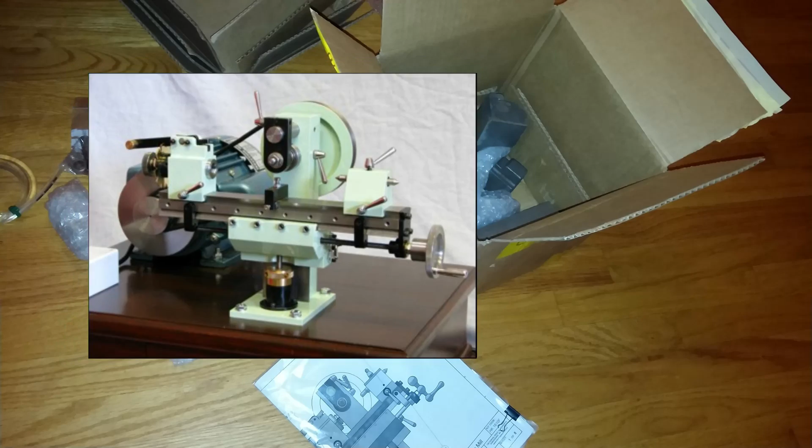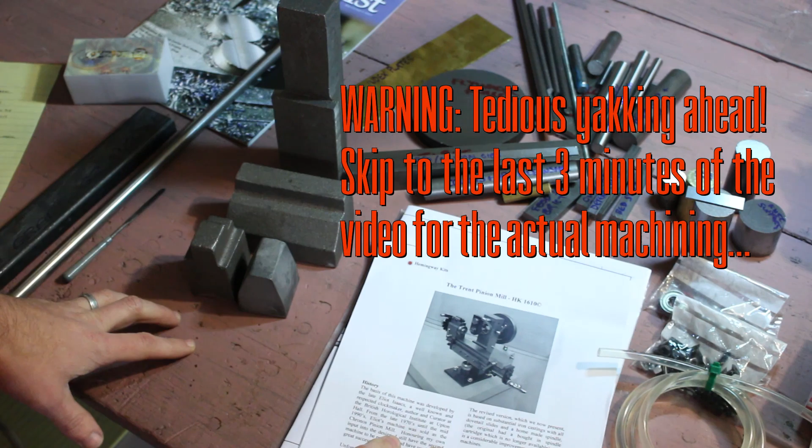What you see spread out before you is the components for the Hemingway Trent Pinion Mill casting kit. For those of you unfamiliar with this machine, it's basically a specialized horizontal knee mill designed for cutting small steel pinions. Some of you might be familiar with this machine in passing. Personally, I sort of lusted after it for quite a while. Always wanted to build this thing.

If you want to learn some more details about it, head over to Hemingway's website and check it out. It's a neat little machine that has an interesting history, and I think will be a really useful machine for me here in the shop as well.

Now, normally I wouldn't spend this kind of money on a project sort of kit of stuff to build something, but this is a machine I can legitimately get a lot of use from in the shop, and it was also a very generous gift from family members for my birthday. I'm not sure if I ever would have purchased it for myself. I've certainly been tempted in the past.

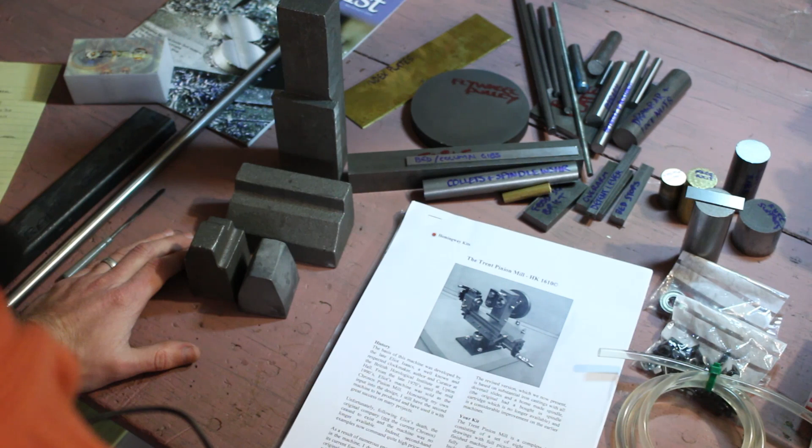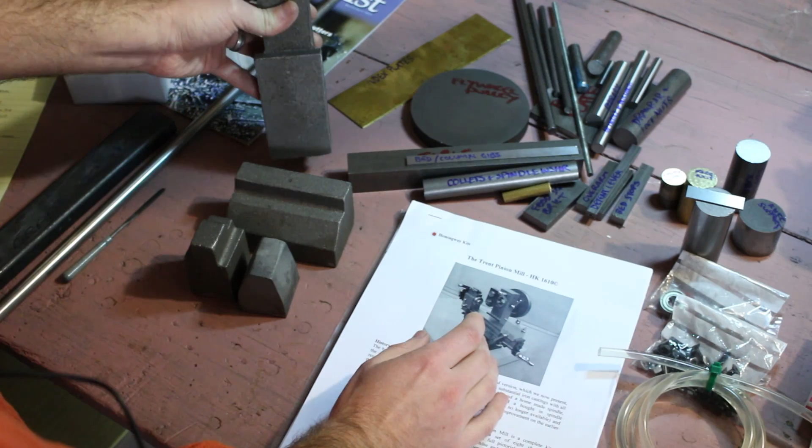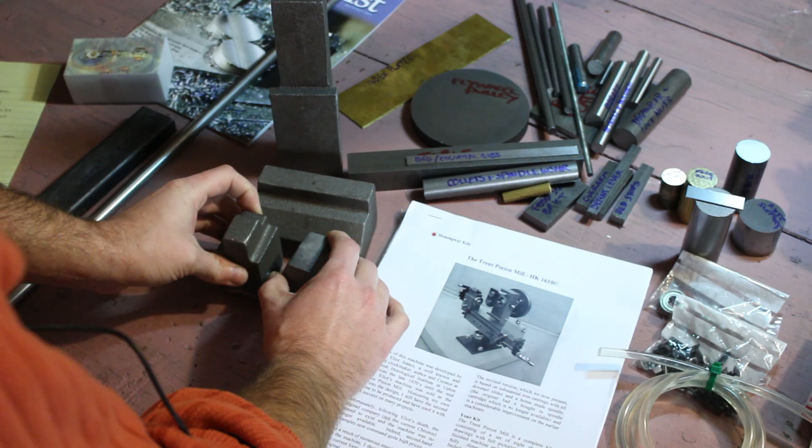As far as castings, there's only a handful here. The column, which will have the dovetails here for the knee. The knee itself. And the headstock and tailstock for the indexing work holding mechanism. You can kind of see here in the picture.

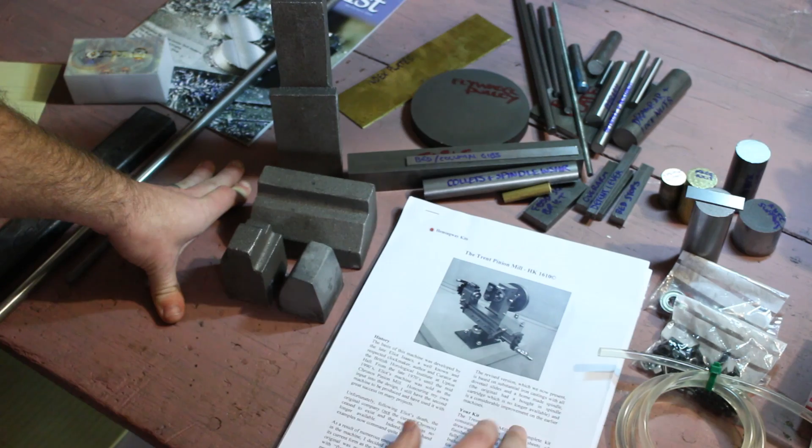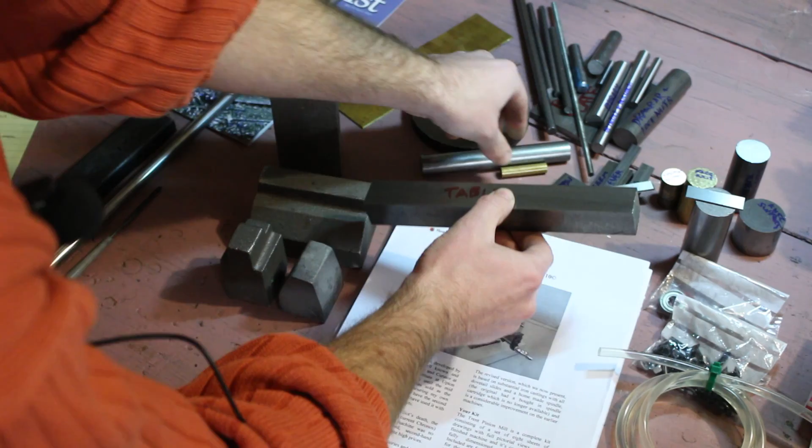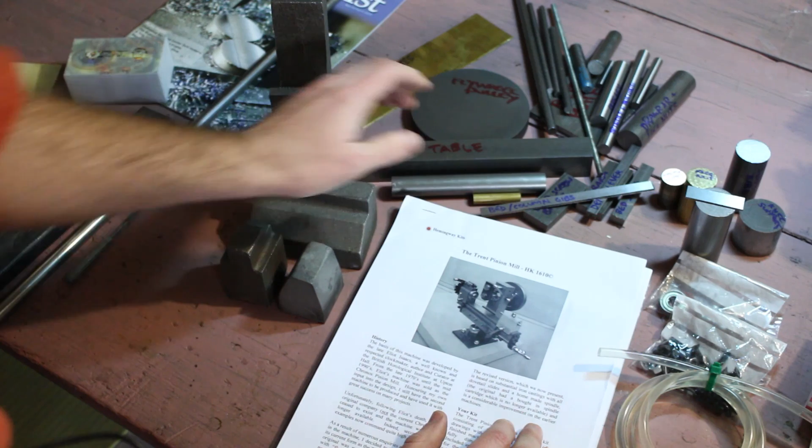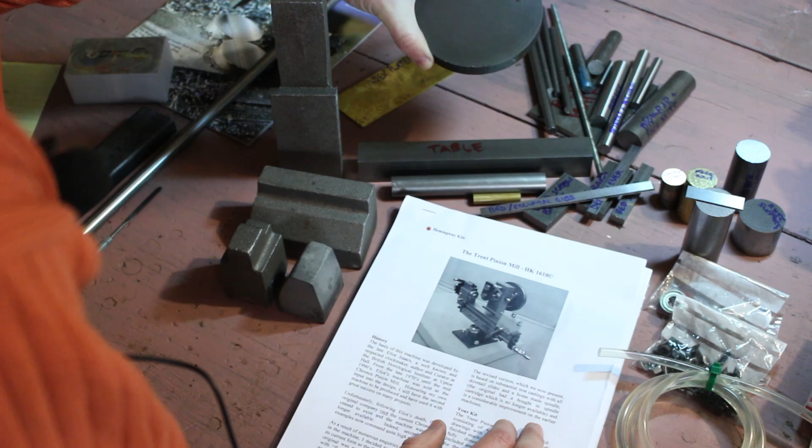The bed or table is not actually a casting at all. It's just made from a piece of cold rolled mild steel. I do have a length of Durabar that I could use instead, but I don't think I'm going to. I think I'm going to stick with the mild steel for that. And the only other cast iron piece is the pulley. This is what appears to be a slice of continuous cast iron, like Durabar, if you will.

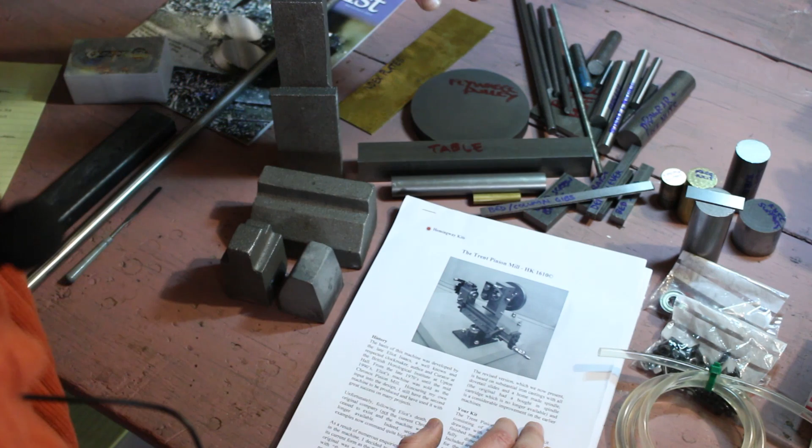The base plate that the column mounts to, that the machine sort of sits on underneath here, that's just a 1/4-inch thick plate of mild steel as well.

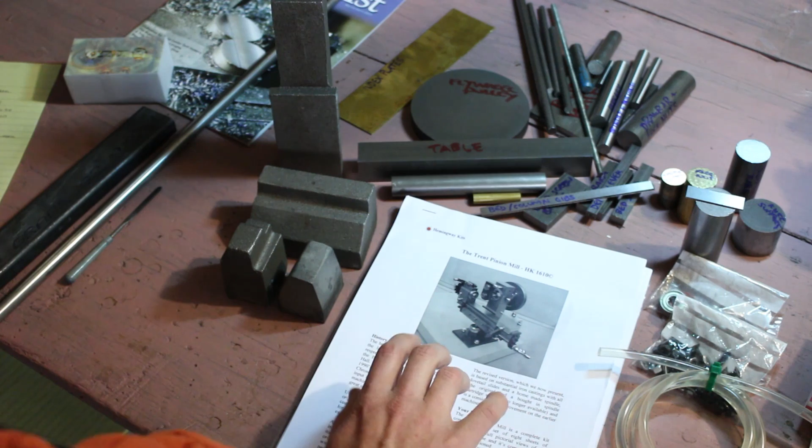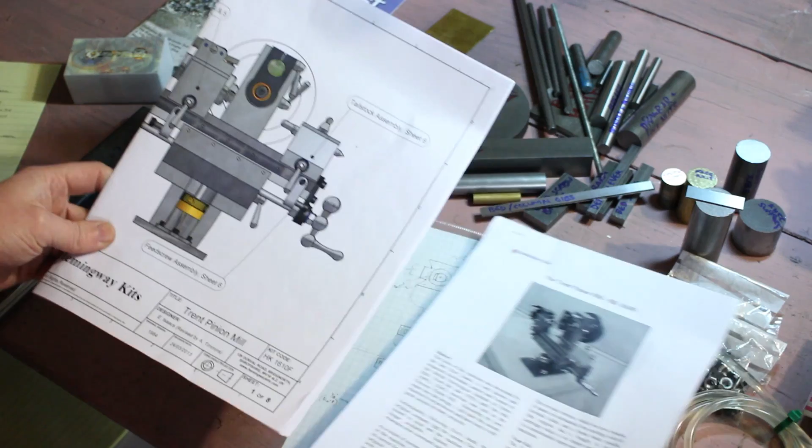One of the things that impressed me the most about the stuff that was sent as part of the kit was the documentation. And Randy Richard, I'm sure you're all familiar with him and his YouTube channel. He's recently built a couple of Hemingway kits, and he made the comment that the drawings that came with them are just fantastic. And he's absolutely right. I mean, they're super nice. Give you a quick look here. If you want a more detailed look, you'll have to buy the kit.

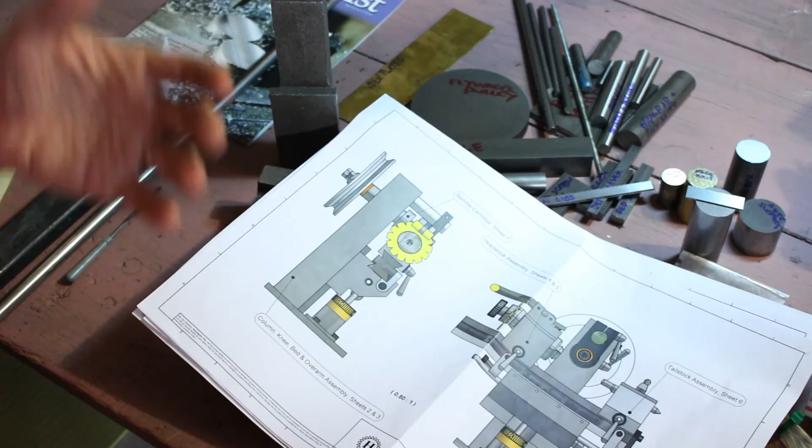I think they sell the drawings separately as well, and this honestly wouldn't be all that much more difficult to build from bar stock. In fact, the machine that this was based on, the Kronos Pinion Mill, was designed to be built from bar stock.

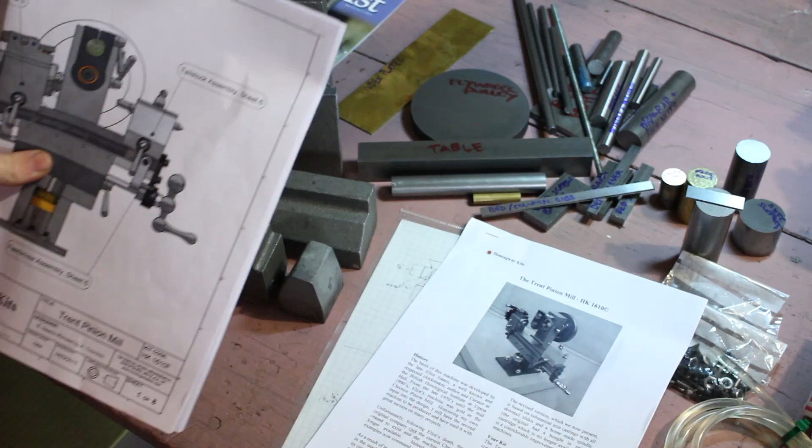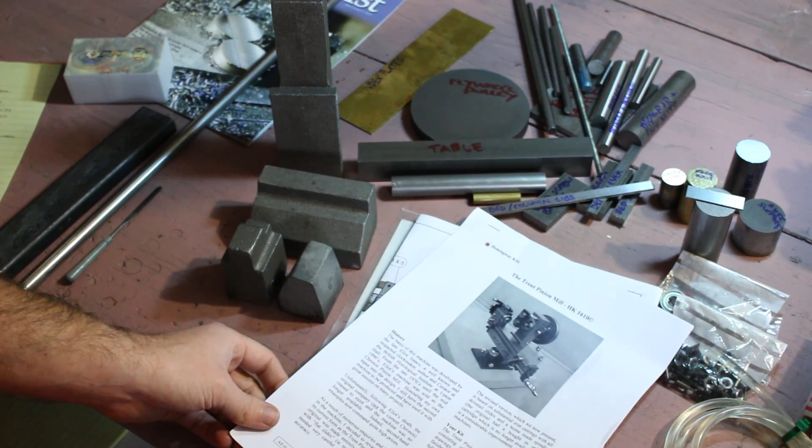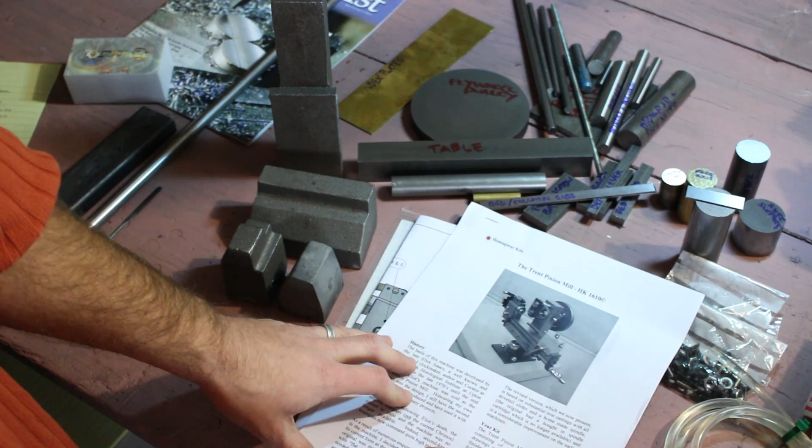Well, the drawings are excellent. What really blew me away that I didn't quite expect: I knew it came with some build documentation, but I didn't expect it to be this thorough and detailed and well written. This is written by Alan Timmins. I believe he's the guy who revamped the original Kronos design to become what is now the Trent Pinion Mill. And it reads like a magazine article. Perhaps it was at one point.

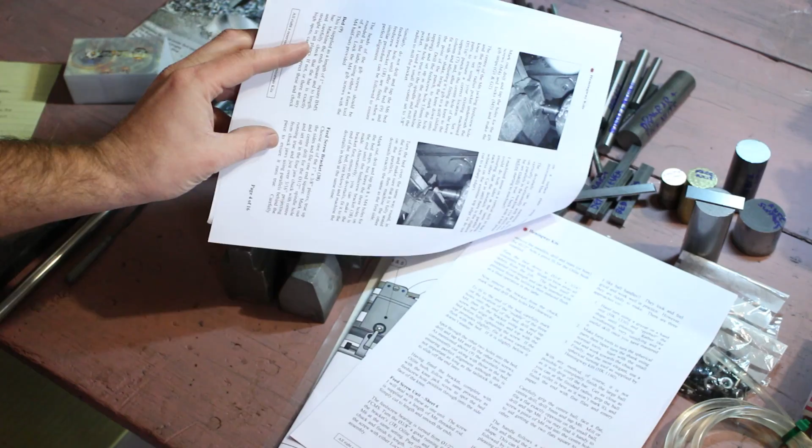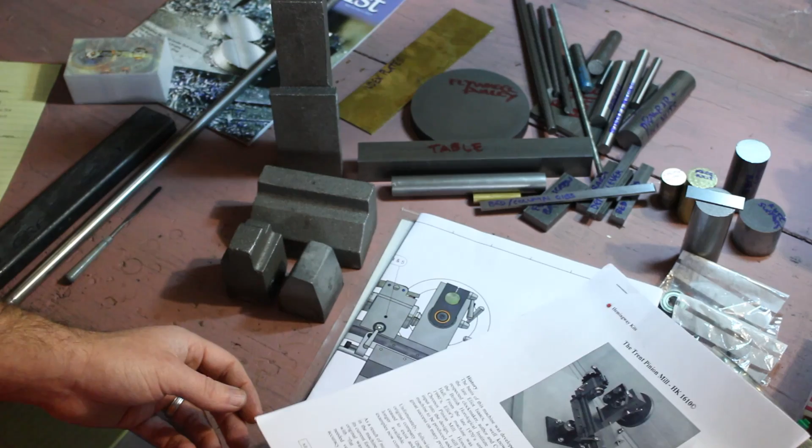Not only is it step-by-step build instructions that are well written, it goes out of its way to tell you why you're doing things particular ways and refer to other parts in the document where there will be steps related to the step you're performing. And there are even some alternatives you can take to some of the steps that are explained. I definitely appreciate that. That makes this a very achievable project, I think.

One of the kind of oddball things that I didn't expect with this, and I think Randy mentioned this in one of his videos as well, I want to say it was for the radius turning attachment. The units are mixed. Most of the dimensions in the drawings are imperial. The only dimensions that aren't are clearance holes for some of the fasteners, for example, because the fasteners are all metric. The feed screws, of course, are metric. I knew that going into it.

That's fine. I'm going to probably be using this machine for the most part to cut module system gears and pinions anyhow. But it sort of rubs me the wrong way mixing metric hardware with the imperial dimensions. There's a few of the threads. I believe it is the indexing spindle drawbar and the collets all have imperial threads. And those are threads that I would be more apt to want to single point.

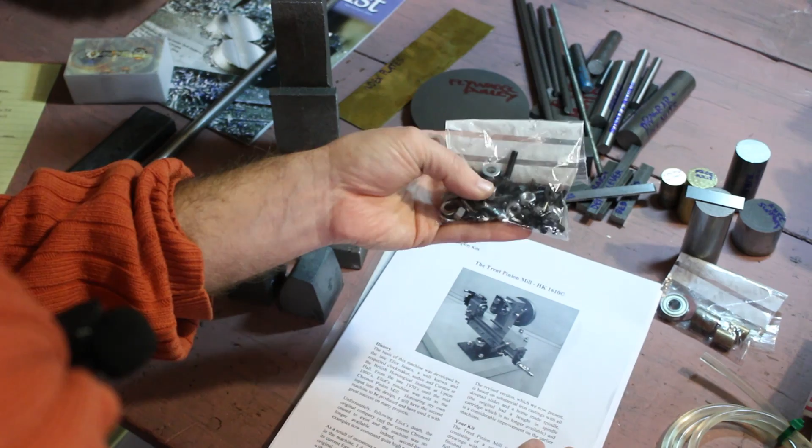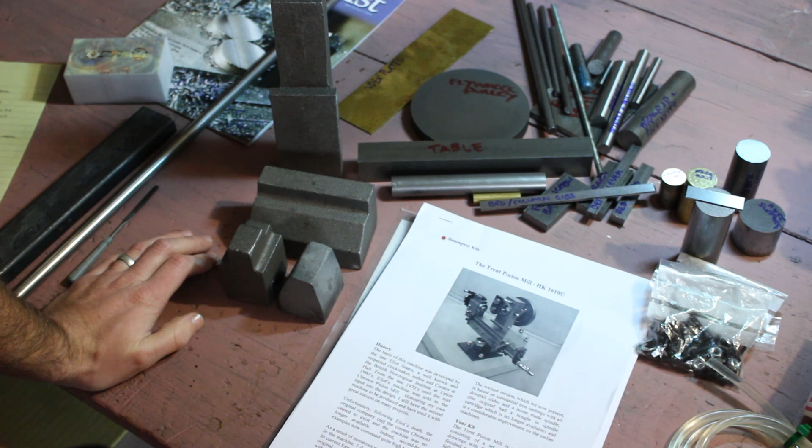But I have a thing for making screws and fasteners, as many people who know me, and probably many people who have been following me could have guessed. I'll take pretty much any excuse to make some screws or bolts for something when it's totally not necessary. I don't know, I just enjoy it for some reason. So putting all this work into a machine like this, I just don't see myself using the out-of-the-box hardware store fasteners, even though they are rather nice.

If I'm going to make them anyways, I might as well make them imperial. I've got a really complete selection of imperial taps and dies. I can single point the imperial threads. It just makes a lot of sense. I'm going to keep the feed screws metric, as I mentioned.

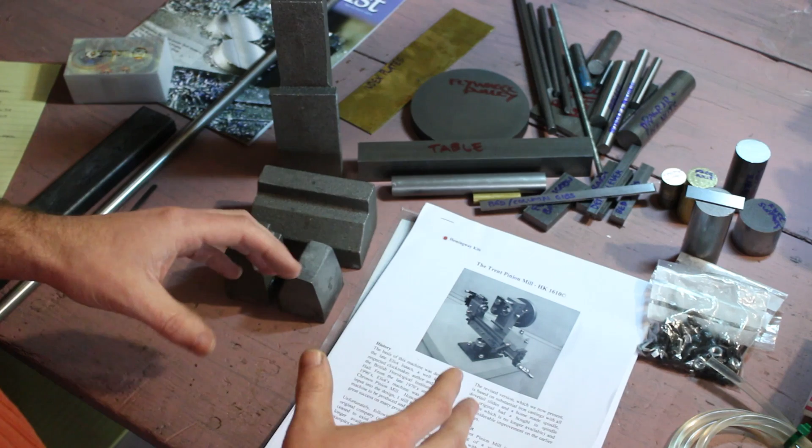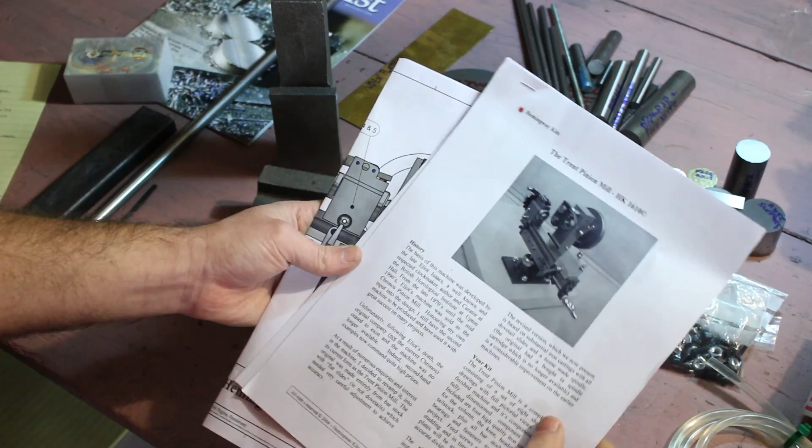If you look at the end of the table where this retaining plate is, this retaining plate that also carries the bearing for the screw feed along the table axis, if it could be decoupled from the table, then the table will slide free and the screw can stay right where it is. And that's really the heart of this.

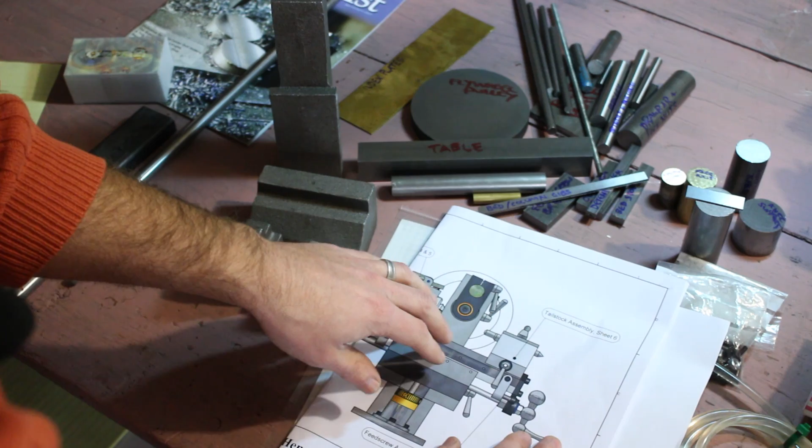Sort of ancillary to that, you obviously have to have a lever mechanism attached to this. And finding a place to do that where it won't be in the way might be a real challenge. I may mount most of the mechanism permanently and then have a way to quickly remove the bulk of the handle just to get it out of the way for when I'm not using it.

But the key is really in here, having a quick toolless way to decouple the screw feed at the carrier here from the table. There's a couple ways to do this, and I'm leaning pretty strongly towards one particular method just because for me, with what I have in the shop here, it will be a lot easier for me to manufacture.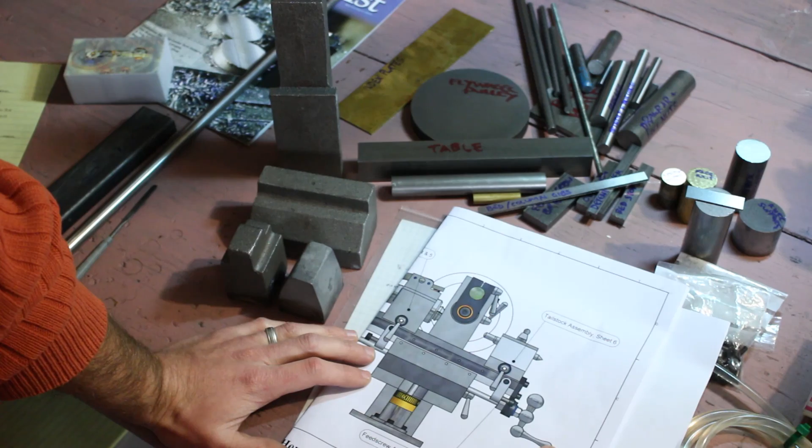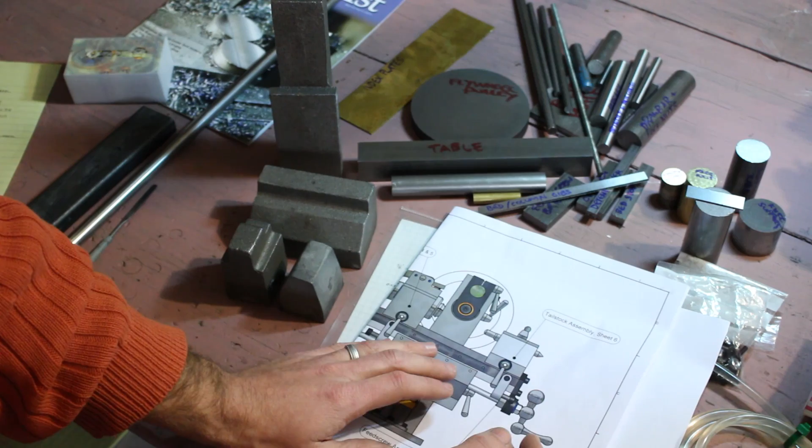So as I say, I'll get into more details about that later, but effectively we'll end up with a mechanism where a lever or thumb wheel or some such thing can be loosened to disengage this feedscrew plate from the table, yet still retain its location so that when it's re-engaged you don't have this screw off its axis at all. That'll probably make a little more sense as we get to that point. For now, I'll just be happy to start making some chips on this thing.

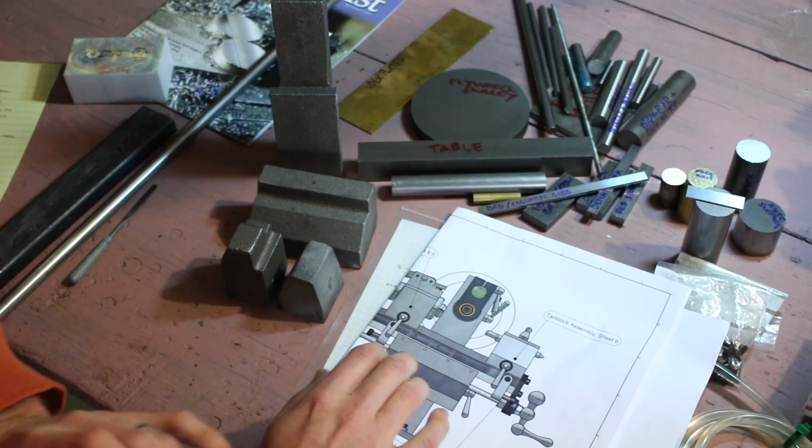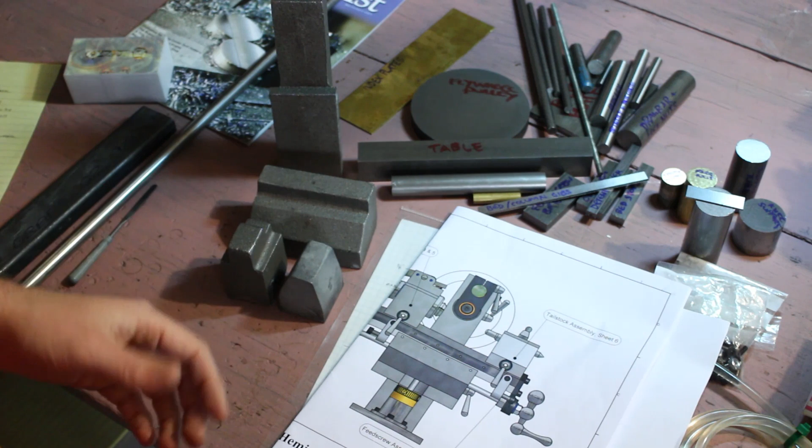I've had the kit here for a little while, and I've spent a lot of time thinking about the design changes, going over the components, reading through the documentation, and just generally being sort of excited about it. One thing that's going to really draw out this project a lot longer than it needs to is that I'm going to scrape the bearing surfaces, all of the slideways on this machine.

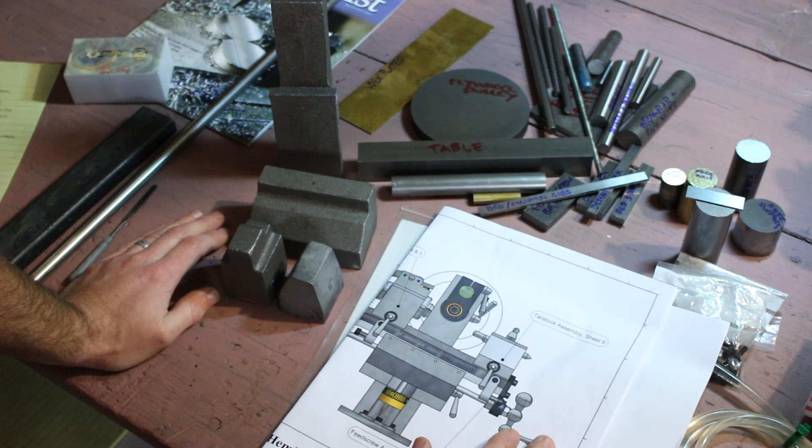I've done several flat surfaces in the past. I've had a decent amount of practice. Never had formal training, of course. I would love to someday. This will be a great opportunity for me to get some practice with some more involved geometry, obviously inside the dovetails. And not only that, but get a feel for scraping very closely interrelated geometry.

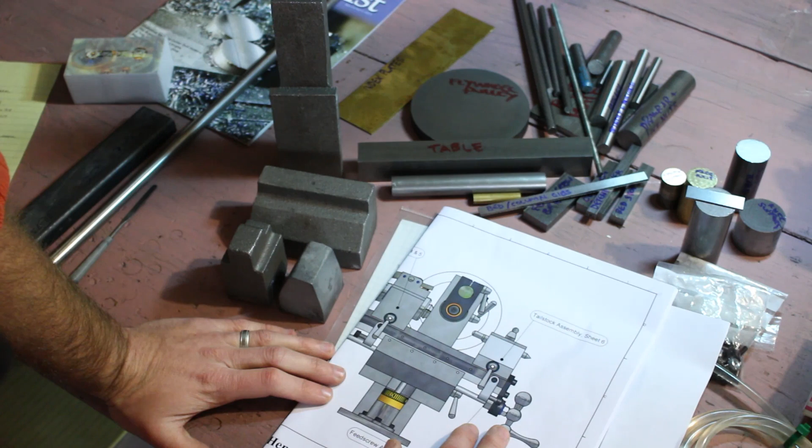For example, the ways on the column here need to be perfectly square to the ways on the top of the knee for the table. This is a very small machine, as you can tell by the parts. Absolutely tiny. So as far as practice with that sort of thing, I think this will be a good one.

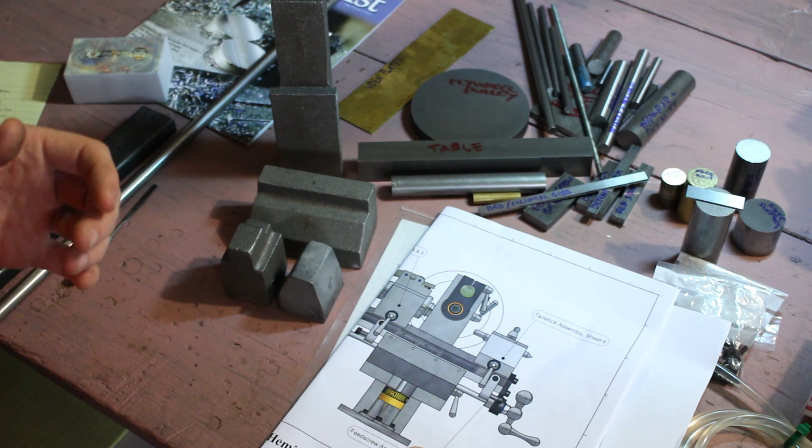My one kind of hang up with all that is that I don't have a gauge that can fit inside the dovetails right now. And I've been sort of threatening to make one for the longest time. There are a few compound and cross slides for some of the lathes that I have that I really would like to rescrape, and I would have the same issue there, not having a way to get a gauge in there to blue up.

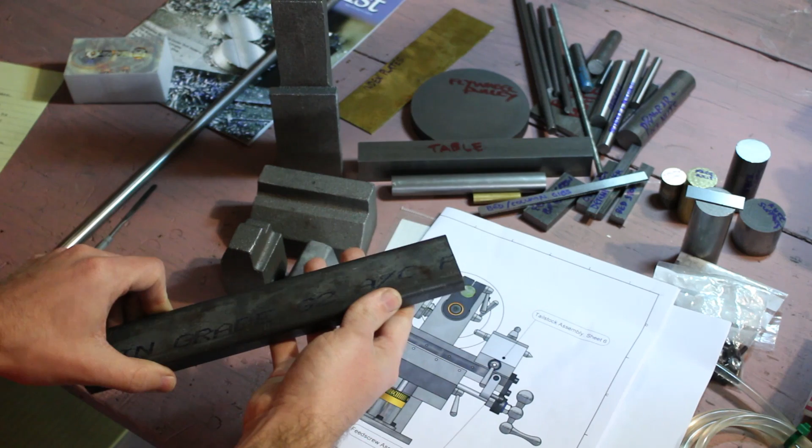So I have this hunk of cast iron here that I'm going to be turning into what's I believe known as a prism gauge. So this will have an angle that is accurately scraped and will fit into the dovetails that I can use for bluing up the male and female dovetails.

If you read through the documentation that comes with the build instructions, they suggest, maybe this isn't the right term, but lapping all of the dovetailed surfaces together, by using an abrasive compound in the dovetails and working them back and forth as you sort of progressively snug up the gibs. And that probably works fine.

I've never tried it myself. I've always been a little too afraid for fear of the abrasives embedding in the slide parts themselves. And I'm sure if you're an abrasives nerd, you'd know exactly which abrasives to use on which materials to keep them from becoming embedded. But since I want to scrape them anyways, it's really irrelevant, I guess.

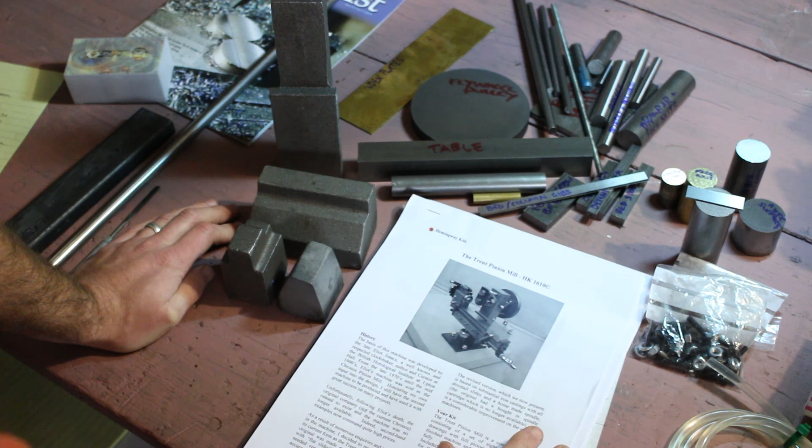But I guess just the point being that scraping them totally isn't necessary. It's all about the level of effort that you want to put into the machine. And that's, I think, kind of what makes kits like this great. So I think that if you wanted to build one of these and weren't really interested in doing any of the unnecessary stuff like the combination screw lever feed, scraping the ways, it really wouldn't have to take a terribly long time. I think most of the work is going to be in the setup operations.

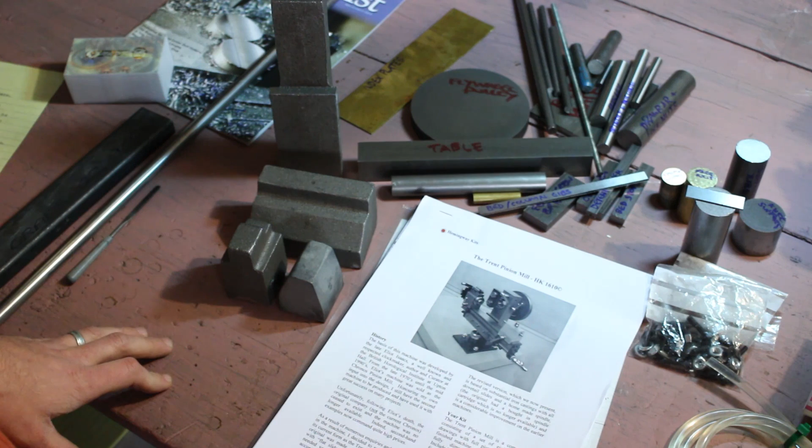And this is the kind of project, I'm sure, where if you start to get in a little bit of a hurry, you're going to pay for it for sure. So the idea here is I'm going to take my time, try to make the best little machine that I can out of it. And I will mention that the reason I want to do a combination lever and screw feed is because, as I sort of alluded to earlier, I want to use this machine not only for cutting pinions, but wheels as well. Particularly small wheels, gears, if you will, for pocket watches and small chronometers.

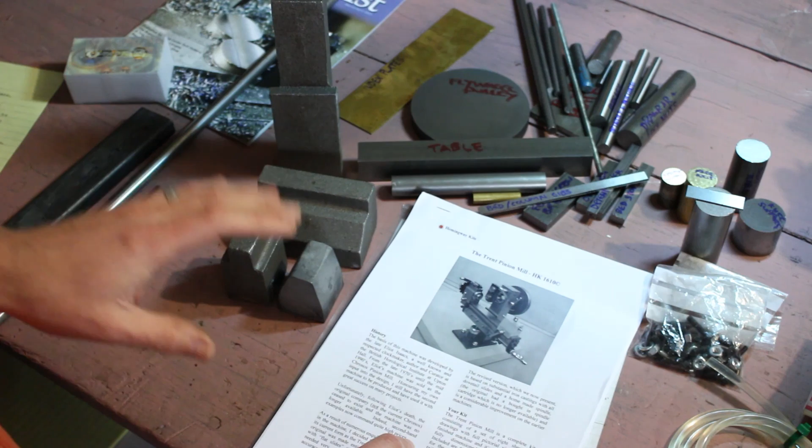Cutting brass wheels, because of the material brass, the fact that they're thin, and the fact that you have so many more teeth to cut than your typical pinion, lever feed's really the way to go. Otherwise, you're forever cranking on the handle. That gets old real quick. Lever feed is just dynamite for a lot of things, and cutting brass gears is one of them.

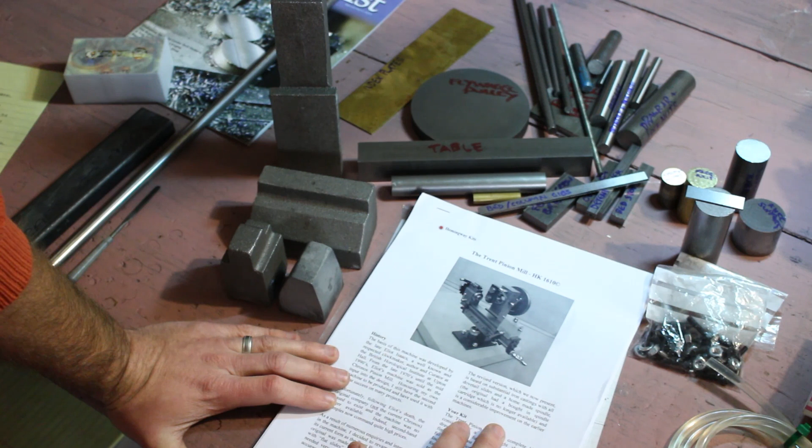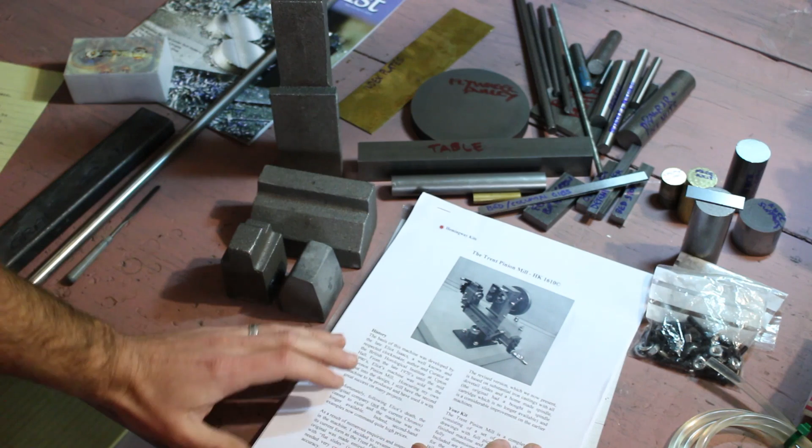On the other hand, pinions are not a lot of fun to cut with lever feed at all, due to the amount of material being removed between each tooth and the fact that you typically would make pinions from steel. So that's really the motivation behind taking the extra time to modify this design for a combination screw and lever feed, so that it's a really nice machine to use for both gears and pinions.

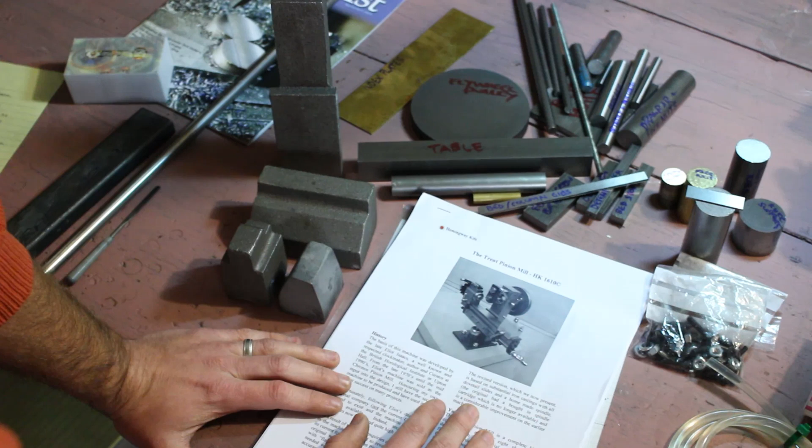So I'm sure I'm leaving something out or not addressing something that probably seems obvious to cover. It's late, it's been a long week, feeling kind of run down.

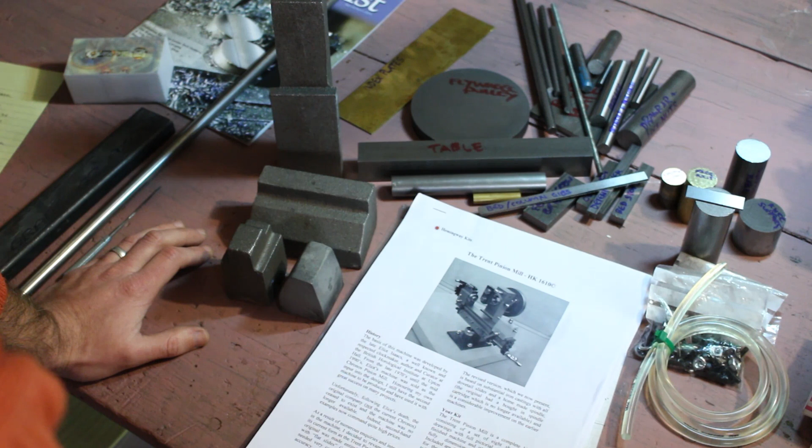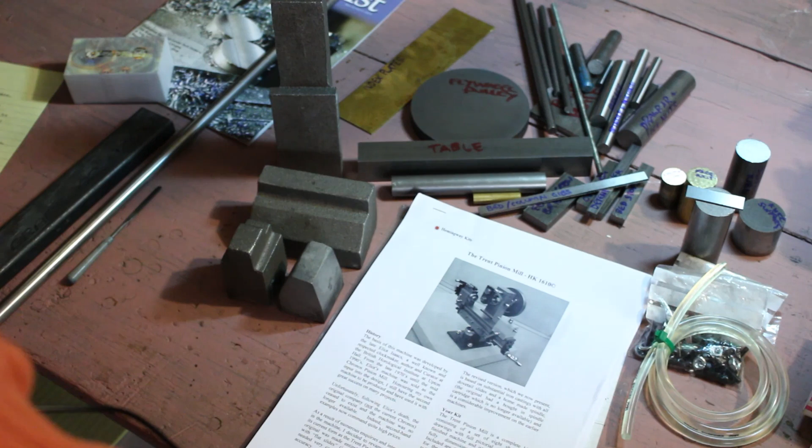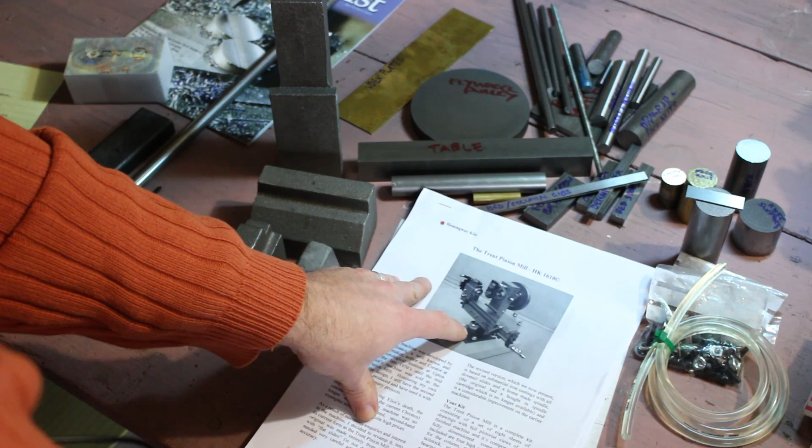What I think I'm going to do next is start with some of the first steps, which involve the base plate and, you can't really see here, but what they call the knee nut support. Little post that comes out of the plate supports the nut for the knee screw. So we'll see what kind of progress we can make, and onward and upward.

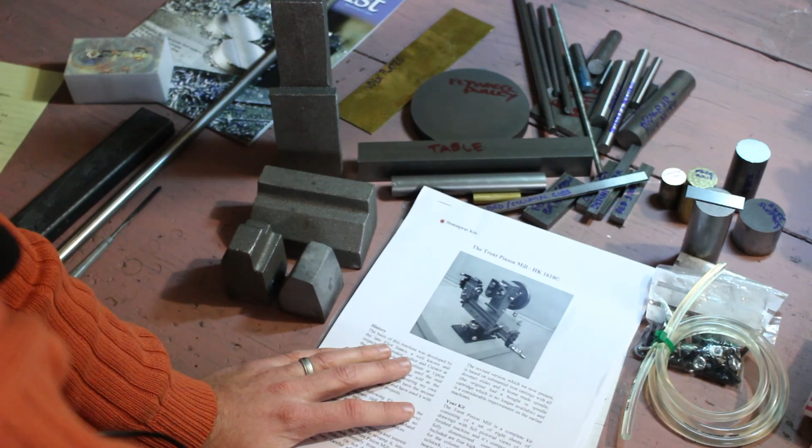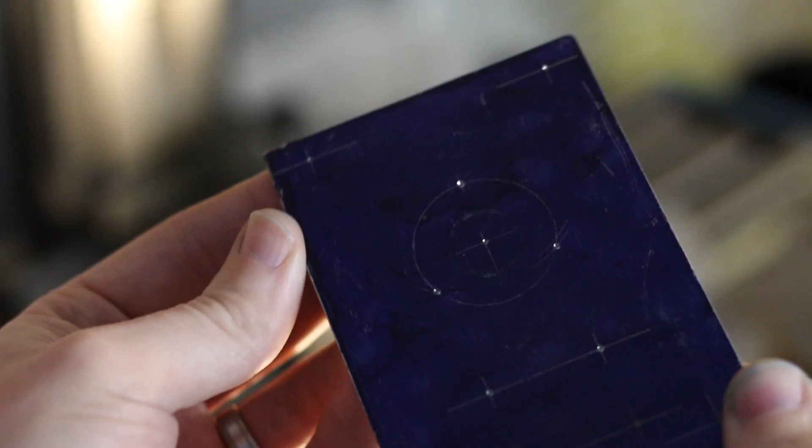As I mentioned, the base plate starts out as a piece of 1/4 inch thick cold rolled steel plate. Off camera I started by just draw filing the edges square and beveling the top surface. I also did a quick scraping job on the top surface. You can see I've also laid out one side of the plate with the hole locations for retaining the column, the knee support, and for attaching the base plate itself to the work surface or bench.

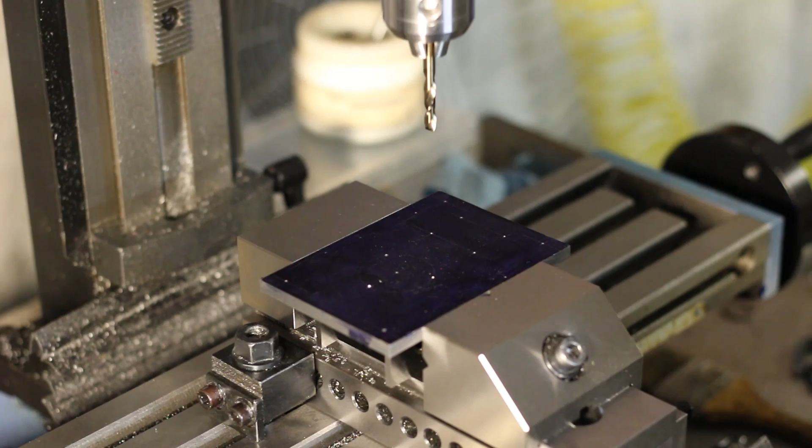With the work set up on a pair of parallels with the scraped surface down, we're just going to drill out the holes from the bottom side of the plate. Quick idiot check here for the hole spacing with my calipers.

We're going to drill the 4 holes in each corner for mounting the plate down to a bench or work surface, and the 4 holes that are inboard set to the rear of the plate to hold the column in place, and the 3 that hold the knee support in place will be left until after the knee support is made. They will be drilled with the knee support itself actually in place to ensure alignment of all the screw holes.

The drawing calls for the column holes to be countersunk 90 degrees, but instead I'm counterboring them here so I can use what are known as cheesehead screws. Lastly, we're going to drill and bore a 5/16 inch diameter hole that will be for locating the knee support later on. I'm using my shop-made miniature boring head here. It takes 1/8 inch round boring bars.